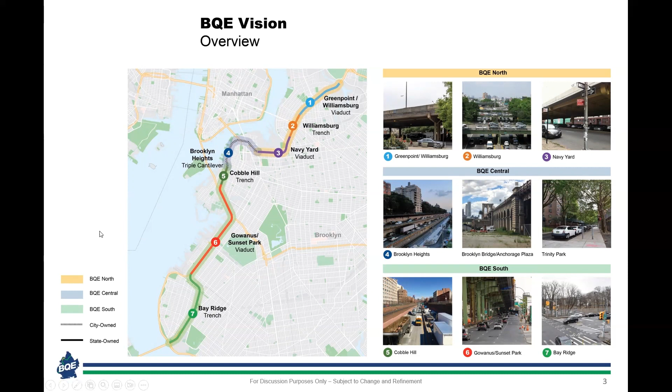We're focusing on the urgency of maintaining a safe city-owned section while reimagining the entire corridor with consideration for sustainable design and centering equity. Moreover, we have a once-in-a-generation opportunity to leverage federal dollars to make these needed repairs and improvements. Our overall timeline is ambitious and is being driven by the anticipated spring 2023 grants that we'd like to apply for, and the overall environmental review and approval timeline.

We don't want to miss this once-in-a-generation opportunity to access transformative federal infrastructure dollars for New Yorkers during the current administration. And most importantly, this project only succeeds through a community-driven process, one that is inclusive, transparent, and consistent.

Here we're showing where we are in our parallel schedule for BQE Central and BQE North and South. Before I walk through BQE Central in detail, I want to note that we are also making progress on the initiatives on the Brooklyn BQE corridor.

For BQE North and South, we completed the first rounds of workshops, mirroring the central process. Currently, our community partners are leading grassroots efforts to gather feedback from their communities, and our next workshop series will take place in late March.

New York City DOT and our sister agencies remain laser focused on delivering safety and public space improvements on city-owned properties along the BQE beginning this year, and will apply for related federal grants in 2023. And on freight diversion, City Hall has kicked off a multi-agency effort to explore viable alternative routes for freight to reduce truck traffic, including on the BQE, such as maritime, last mile, and rail solutions.

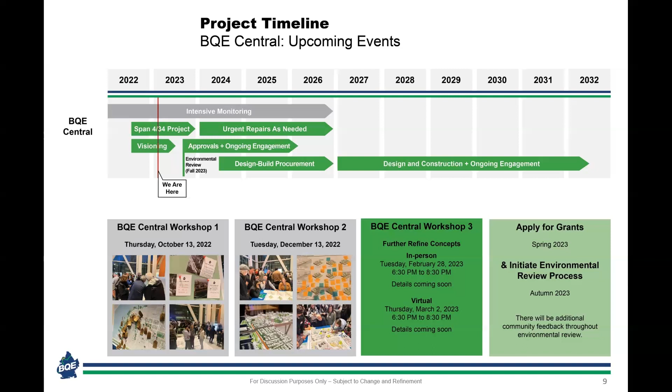This means we are adjusting our schedule by a few months. Instead of beginning environmental review in spring 2023, we anticipate we will begin the process as early as the autumn of 2023, a process through which there will be additional opportunities for community feedback. The schedule has been adjusted accordingly with finalization of design and construction beginning in early 2027. I want to be clear that New York City DOT is prepared to apply for federal infrastructure grants this year for BQE Central, and we'll pursue these funds with a competitive application.

Throughout this process, we've heard a deep desire from our community to better understand the environmental review process, its purpose, and opportunities for public engagement. We've created a brief explainer video to summarize the process, which we're going to play for everyone now.

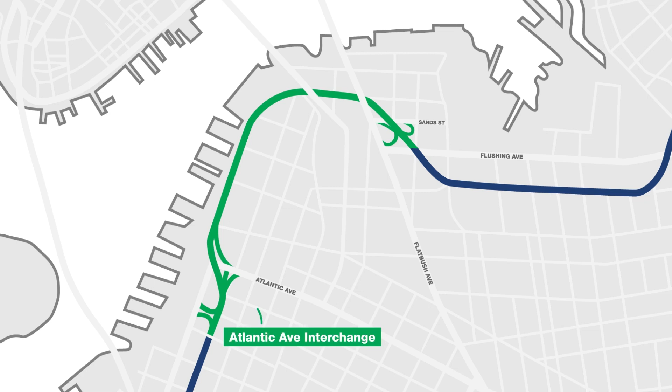The Brooklyn-Queens Expressway Corridor Vision, BQE Central. BQE Central is a 1.5-mile section of the Brooklyn-Queens Expressway from the Atlantic Avenue Interchange to the Sands Street Interchange. It has multiple bridge structures, including the historic triple cantilever, as well as ramps and retaining walls.

The New York City Department of Transportation is leading a comprehensive community engagement process to plan for the safe, modern, and resilient structure we need. Once a community-driven concept is refined, the next step in the project will be an environmental review compliant with the National Environmental Policy Act, or NEPA. That process will last about 2 years and includes several opportunities for community feedback.

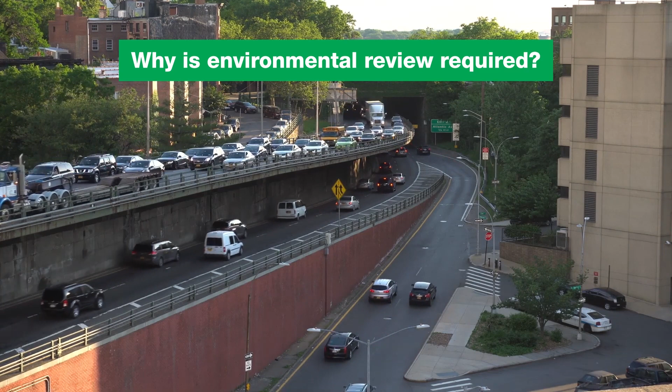NEPA requires federal agencies to examine the potential effects of their policies and programs on the built and natural environment. DOT will seek approval by the Federal Highway Administration for the design and funding of BQE Central, and therefore the project must comply with NEPA and other related federal, state, and local regulations. Consistent with NEPA, a federal agency must clearly identify the purpose, need, and objectives for a proposed action, a reasonable range of alternatives for the action, and the environmental impacts of the action on the built and natural environment.

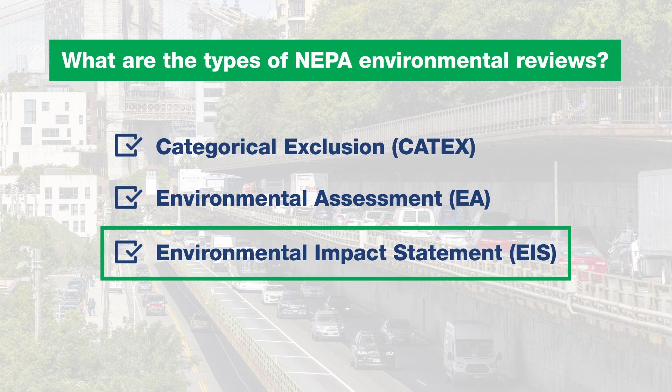The NEPA process can take the form of a categorical exclusion, environmental assessment, or EA, or environmental impact statement, or EIS. Based on the requirements of NEPA, DOT expects to conduct an EIS for BQE Central. An EIS is the most rigorous level of review under NEPA.

NEPA requires that the public have meaningful opportunity to provide input into the scope of the analysis and the environmental impacts and related mitigation measures presented in the environmental document, either a draft EA or EIS.

As part of the NEPA environmental review, DOT will also meet requirements of the New York City Environmental Quality Review, or CEQR process. CEQR requires city agencies to assess, disclose, and mitigate, to the extent practicable, the significant environmental consequences of their decisions in order to meet the description within the CEQR Technical Manual, Chapter 1.

Following the comprehensive community engagement process, DOT will initiate the environmental review in the fall of 2023. We expect the NEPA EIS will take approximately 2 years. Once the environmental review is complete, DOT and our contractors will complete design and begin implementation. DOT will support ongoing monitoring and repairs throughout the process.

To learn about the progress on BQE Central, visit nyc.gov/BQE. New York City Department of Transportation, copyright NYC DOT, 2023.

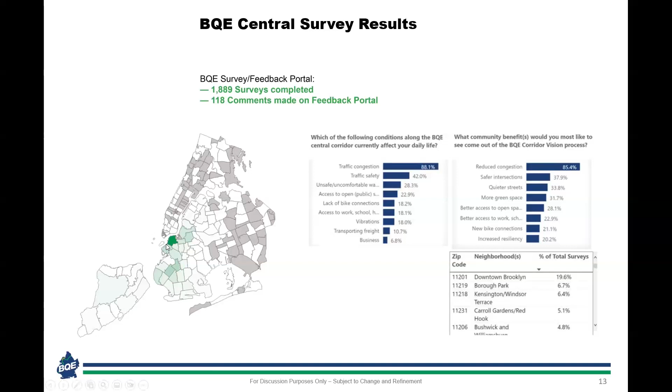As Julie mentioned, we are now in our third round of engagement for BQE Central. Throughout this process, we have received a tremendous amount of feedback in virtual and in-person meetings, the online survey, and small stakeholder meetings. These ranged from concerns around traffic and safety to a desire to explore opportunities for new parks, transit infrastructure, and neighborhood connections.

In December, approximately 500 people participated in an in-person and virtual meeting for round 2 to help us shape the vision and provide feedback on a menu of ideas for BQE Central. We heard a lot of specific feedback about the concepts we presented, as well as a lot of constructive ideas about how to help people evaluate trade-offs, provide more transparent information, and better explain core design and engineering terms.

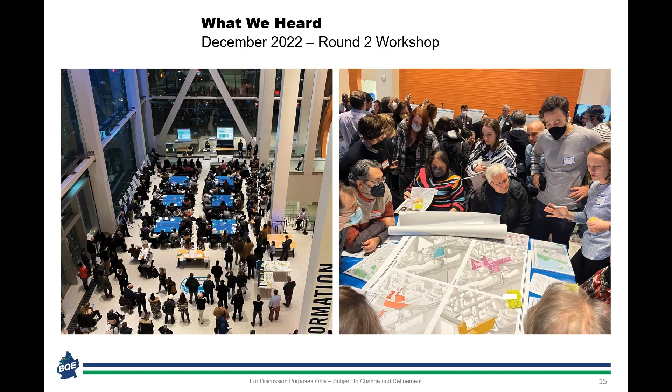Specifically, our team heard a lot of feedback about how BQE Central integrates with other regional initiatives and considerations, including how the city can better organize regional freight movement, including increasing off-hour deliveries and maritime freight, efforts to address vehicle miles traveled with an emphasis on reducing trucks in environmental justice communities, ensuring that construction impacts are well communicated, especially to lessen impacts to small businesses. And finally, ensuring that maintenance planning is central to all investments.

Following our last round of engagement, we wanted to provide a fuller explanation of how the project is addressing several key community focuses, including the overall potential roadway width and the number of lanes possible for BQE Central, how the project affirms and supports the city's climate adaptation strategy, how we as a city and you as stakeholders in this process can support a transparent decision-making process that clearly illustrates trade-offs, and how this project reflects an equitable and balanced approach to planning and investment throughout the Brooklyn corridor and the city more broadly.

In our last round of meetings, our team presented concepts that represented a roadway width of approximately 40 feet and had 2 travel lanes and a shoulder. I should mention that this reflects the roadway width in one direction, Staten Island bound or Queens bound. The specific width of the roadway is something that cannot be predetermined in this part of the process and will require state and federal approval and input in accordance with safety standards.

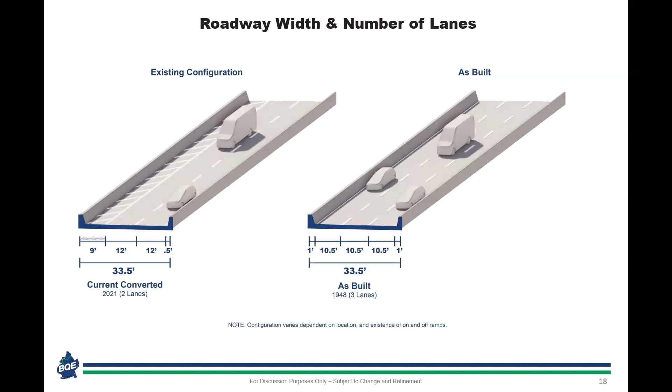For a long-term fix to the cantilever, we are evaluating the potential for either a two-lane roadway built to modern safety standards or a three-lane roadway built to modern safety standards. In the two-lane configuration, in addition to two 12-foot lanes, we would propose shoulders on the inside and outside for safety, resulting in a 38 to 44-foot roadway, along with appropriate provisions for merging for traffic from the ramps.

I quote a range here, 38 to 44 feet, because the two shoulders at federal standard width add up to 20 feet, but the city could pursue deviations from the Federal Highway Administration to allow for narrower shoulders. We understand that there are highways in New York City where people regularly experience more constrained and substandard lane and shoulder widths. However, improving safety is critical, and such exceptions are infrequently granted for new or rehabilitated highways.

As part of our BQE Central studies, we must consider the upstream and downstream impacts of diverted traffic on other communities. In our traffic analysis this spring and summer, we will assess how lane configuration will impact surrounding neighborhoods along the BQE corridor.

In a three-lane configuration, there would be three 12-foot lanes with shoulders on both sides, resulting in a 50 to 56-foot wide roadway, again with maximum 20-foot shoulders total.

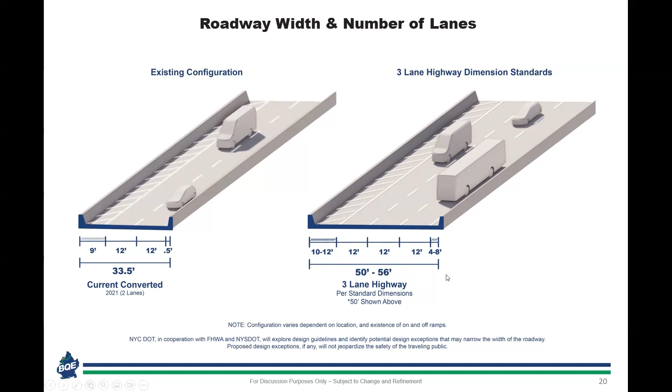We are prioritizing safety within this project, although we must remain flexible in certain constrained locations where there is limited potential to increase the width, such as when the BQE goes under the Brooklyn Bridge.

For comparison, here's what the existing 2-lane configuration looks like as compared to a standardized 2-lane and 3-lane configuration.

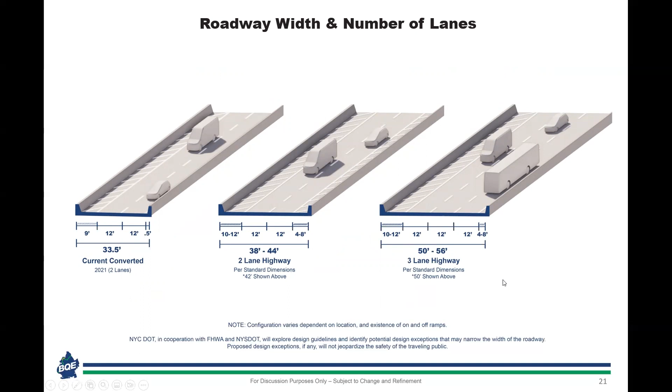To recap, DOT is committed to studying both 2- and 3-lane roadway configurations. We are required to study current traffic demand and potential demand in the future. We will incorporate known plans into our analysis, such as congestion pricing, to assess how a 2-lane or 3-lane capacity meets the needed demand through the project limits.

This will also help us to understand the potential resulting effects now and in the future across the entire BQE corridor in Brooklyn. In coordination with the New York State Department of Transportation and Federal Highway Administration, the New York City Department of Transportation is developing the study requirements, and the final decision about this section of interstate will be made with our federal and state partners through the environmental review process.

The study will start in the coming months while other documentation is also completed, after which we will update the public of the results. Environmental review is anticipated to begin as early as fall 2023 in coordination with our state and federal partners.

Following our previous presentation, many people asked for further explanation of the partial versus full replacement options.

A partial replacement approach would maintain the existing retaining walls of the triple cantilever, but create a new frame structure in conjunction with repairs to the retaining walls to increase the lifespan of the structure. This means construction would have lesser implications for adjacent properties, but also do less to mitigate the vibrations they currently experience. This approach also reduces the flexibility in how the framed structure is configured.

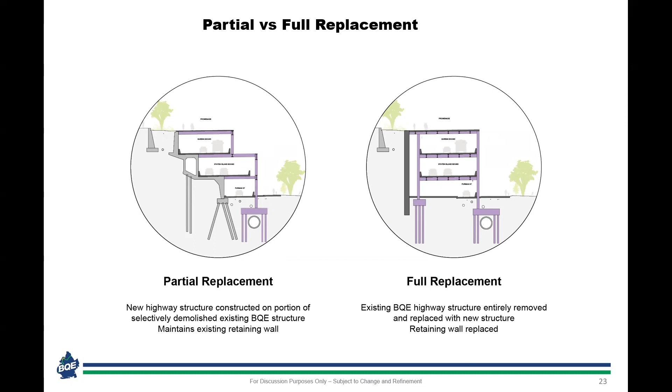A full replacement approach would replace the existing retaining wall, resulting in a completely separated roadway structure from the wall supporting the bluff, likely doing more to mitigate vibrations in surrounding communities. This also allows for greater flexibility for any new structure.

We promised to come back to you today to speak about the construction process. While we can't describe an approach in detail before a design is further developed, we want to share at a high level what would be under consideration. There are two possible approaches to a construction project like this: temporary bypass or traffic diversion.

A temporary bypass requires building a temporary structure or structures that reroute traffic off of BQE Central to allow the BQE to be under construction. Depending on the length of the bypass, it could take around 1 year to build and be in service for 2 to 3 years, with less time for shorter segments.

This means a bypass would shorten the length of construction, but would create larger temporary structures adjacent to Brooklyn Bridge Park and adjacent buildings. As we've said from day one, DOT will not build a temporary bypass at grade with the promenade or with Brooklyn Bridge Park.

On the other hand, traffic diversion requires ongoing overnight closures for nighttime construction and several weekend shutdowns. Our modeling shows that such diversion would increase local traffic significantly and require truck detours via local streets that are not truck routes. This approach would also result in longer construction durations and potentially limit the flexibility of concepts in certain areas.

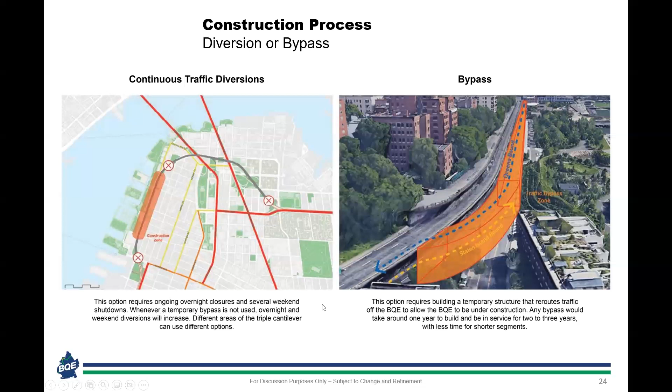During our outreach, many people wanted to see climate action reflected more prominently across all our proposals. DOT is investigating opportunities to integrate approaches that promote environmental sustainability, encourage mode shift and greenhouse gas emissions reductions, and explore opportunities for sustainable freight and goods movement.

DOT is already working with agency partners to encourage truck electrification, cargo bikes, and maritime freight, while advocating for necessary state legislative changes and pursuing federal grants for additional support.

The city is also keenly aware of the potential impact that congestion pricing may have on BQE drivers, though its impact is unlikely to result in traffic evaporation without more aggressive approaches to reduce demand.

Many of these big ideas need to be explored in the context of the city's larger climate strategy, and we look forward to sharing these solutions with you as the design process progresses.

Lastly, participants have expressed a shared interest in better understanding the trade-offs that will be considered in this decision-making process, from both the city's perspective and the community's. We understand that not everyone goes into a process with the same priorities, and that each individual evaluates a project based on a different set of inputs and ideals.

A handout is available with a list of these considerations and some related questions we are considering for you to keep in mind as you view and discuss concepts today.

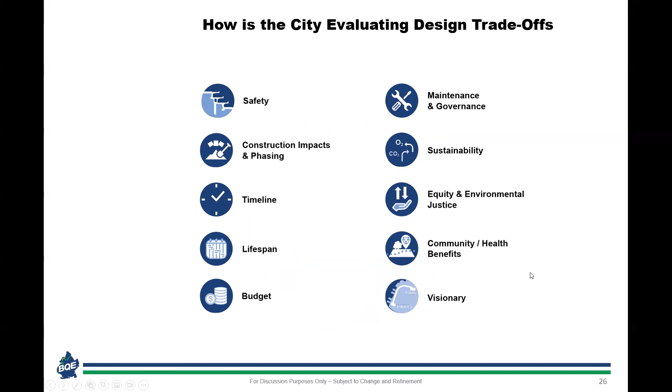Thank you, Bahish. Based on the comprehensive feedback that we received during the last round of workshops, the design team has been working over the past couple of months to advance a refined set of concepts for community review and discussion.

As we go through each concept, we will provide an overview of what was shown previously, a summary of what you liked and didn't like. Then we will illustrate a refined concept with an emphasis on showing eye-level perspectives to help you understand how these spaces might feel at a pedestrian scale.

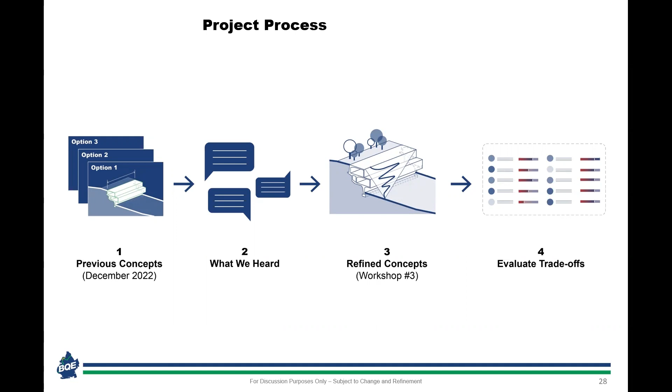And as we move beyond this phase, we'll present some of the trade-offs of each concept. Before we do, it's worth restating that one of the core goals in the BQE Central project is to balance the regional need for transportation infrastructure within the reality of a dense urban neighborhood.

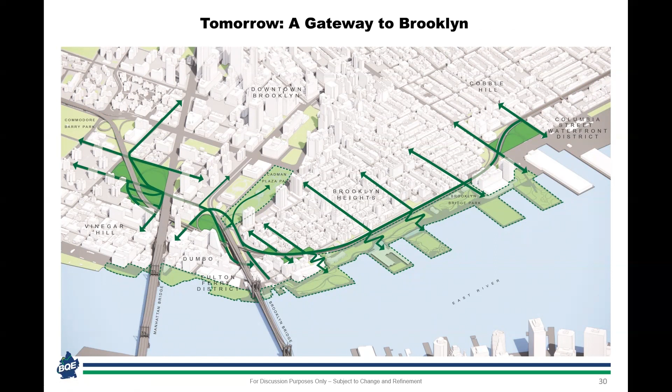We want to work with you to explore strategies that overcome the highway as a physical barrier between downtown Brooklyn, Brooklyn Heights, DUMBO, and the waterfront, and highlight ways of transforming it into an inviting gateway to Brooklyn's downtown, waterfront, and historic neighborhoods.

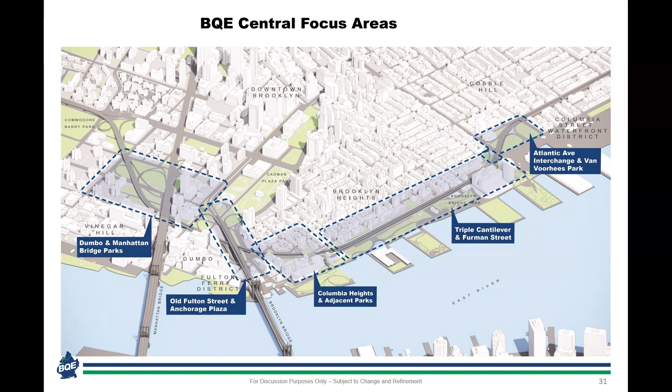For each design concept, we will zoom into one of 5 focus areas, moving from the triple cantilever to the remaining sections. I'll now invite Jeremy Siegel from Bjarke Ingels Group to walk everyone through our latest design concepts for the triple cantilever.

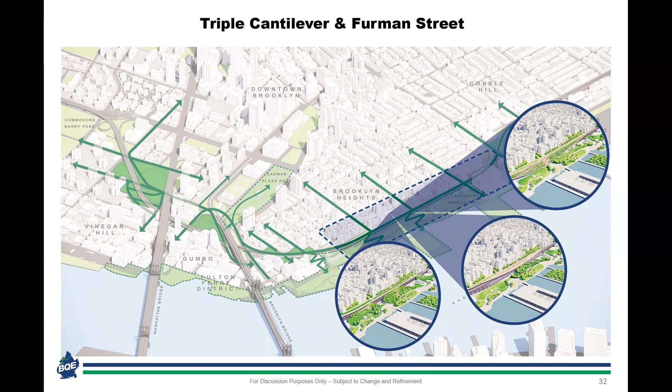Thank you, David. So during our last workshop in December, we presented 3 different approaches to the triple cantilever section of the BQE: the terraces, the lookout, and the stoop. In going through these concepts, we heard a lot of constructive feedback and some very specific questions related to the engineering, impacts, and trade-offs of each of these concepts.

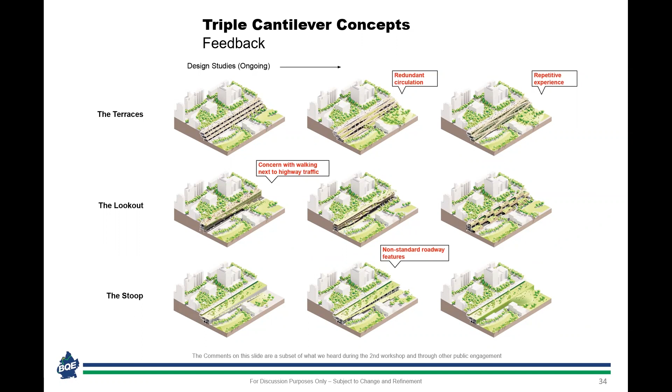We also heard an appetite to better understand these concepts at a more experiential level, with a focus on how each works at specific pinch points and existing views. After presenting a menu of design studies, many people expressed feedback and concerns about designs that would place pedestrians in close contact with traffic, have repetitive circulation and experience, and produce non-standard roadway features. We digested that feedback and have used the past several months to refine our design approach and clarify some of these questions.

Today, we will present updates on the 3 concepts from the last workshop. We will begin with terraces, then discuss the lookout, and finally provide an updated design concept for the stoop. Of these 3 concepts, the open space approach for the terraces and the lookout can work in both a partial and a full replacement. The last option, the stoop, can only work as a full replacement. In the graphics shown tonight, the terraces have been illustrated with a partial replacement of structure, while the stoop and the lookout are both shown as complete replacements of the structure.

Today, we want to hear from you what you like about each of these open space strategies, since elements of all of these concepts can be adopted in a further refined design.

As we shared at our last meeting, during our first round of outreach, many people expressed they wanted to see a design that would achieve something similar to what was illustrated in the BQ Park concept, which was depicted as a fully covered roadway running through Brooklyn Bridge Park along Furman Street, with an open space covering the entire length of the corridor. Through in-depth review of the BQ Park proposal, several challenges were identified for both 2-lane and 3-lane configurations, including roadway geometry limitations, physical infrastructure conflicts with private property, building foundations, MTA infrastructure, and utilities.

To capture the spirit of the BQ Park proposal, the team has been exploring concepts with partial tunnels and decking, including the stoop, which has similar benefits, including additional open space, less visible roadway structure, while meeting geometry standards. This and other concepts have been presented publicly and continue to be refined.

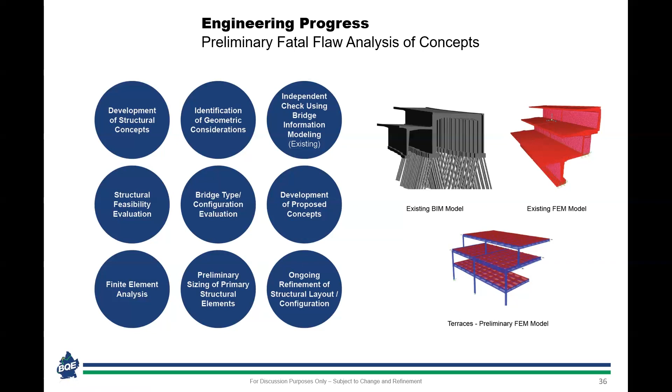It is important to note that the final configurations of open space may have design impacts and will continue to be carefully considered. We will continue our design development as we refine the concepts to ensure that traffic and safety are appropriately addressed. During our last workshop, we presented the terraces in combination with a partial replacement of the structure.

We noted that the terraces, as a partial replacement that reuses the existing retaining walls of the structure, could have an open space approach that follows the stepped profile of the new roadway. Many people expressed concerns about the proximity of these open spaces to traffic and were unclear how these potential open spaces could connect to existing pedestrian corridors, which we aim to address in this refined concept.

Throughout our outreach, we consistently heard how important it is for us to better connect people to the major pedestrian routes and transit nodes in Brooklyn Heights, especially Cranberry Street with access to the A and C trains, Clark Street with access to the 2 and 3 trains, and Montague Street, which connects to the R, 4, and 5 trains.

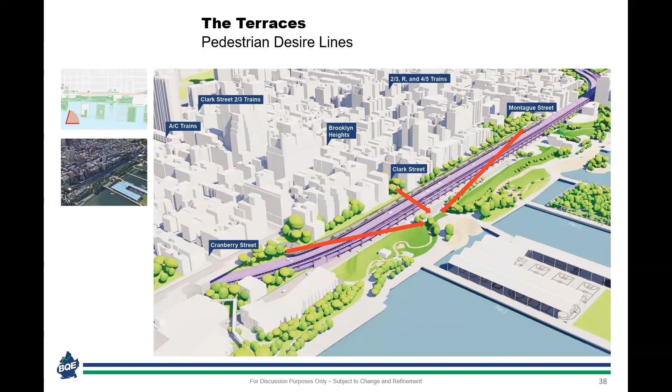These pedestrian desire lines inspired our refined approach. Using these key pedestrian routes as a starting point and ramping downward, the team adopted a design that brings 2 standard accessible ramps together from the promenade all the way to Furman Street, where the berms of Brooklyn Bridge Park have an arrival plaza at Clark Street.

At Clark Street in Brooklyn Heights, a series of steps cascades directly down into the park, emphasizing one of the most important access points between Brooklyn Heights, downtown Brooklyn, and Brooklyn Bridge Park. This approach worked to limit any impacts to the existing berms of Brooklyn Bridge Park while lessening the visual presence of the highway as seen from both the promenade and the park.

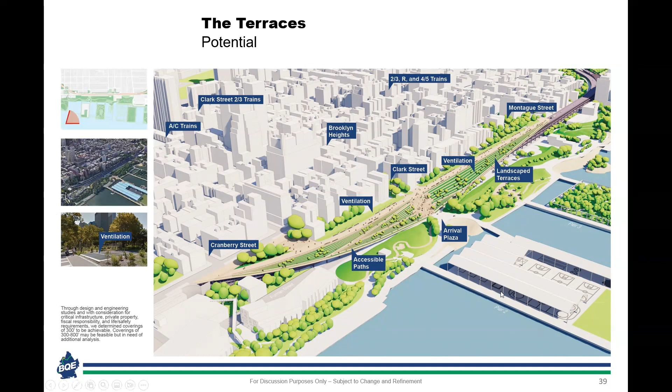To make this approach work, further study of ventilation, life safety requirements for the structure would be required during the design process. While we believe that this design approach could work, we want to acknowledge that provisions for natural ventilation spaced at intervals will be required in any partial tunnel greater than 300 feet in length.

In this design approach, the terraces could form a stepped landscape that parallels the contours of the roadway, minimizing the impact to the existing berms while maximizing access from the promenade to the park. The terraces themselves could have a generous planting that winds down the steep slope, similar to a new park space designed for the Brooklyn Botanic Garden, which has similarly steep slopes, but offers an intimate landscape experience for pedestrians along its winding paths.

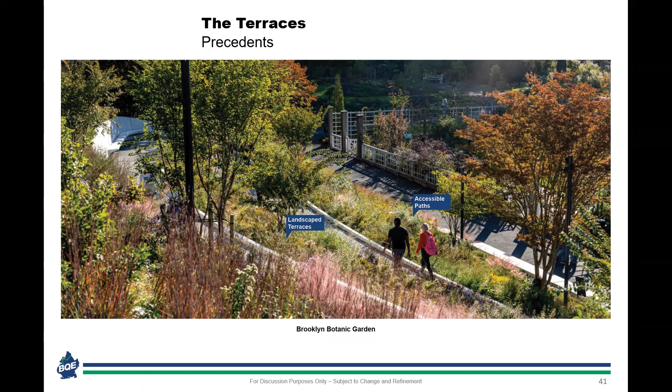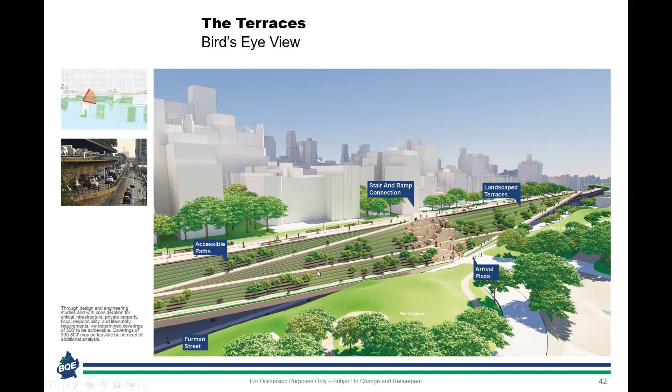Looking towards Brooklyn Heights at Clark Street, these terraces limit the visual impact of the structure between the berms, while fostering a unique approach that integrates landscape and transportation infrastructure, while also allowing air to pass through the structure at the sides.

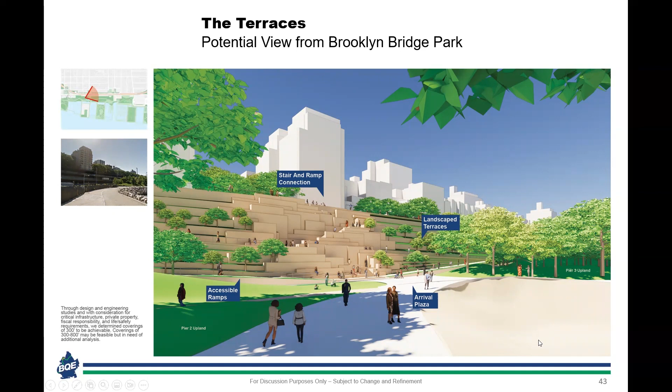From within Brooklyn Bridge Park, pedestrians would look towards a new access route to the promenade at Clark Street, offering a more direct connection from the park to the neighborhood and the subway. On the terraces themselves, the design might feel like a stepped amphitheater oriented out towards the East River over Furman Street, serving as a multifunctional space for sitting, lounging, exercise, and travel.

At the promenade level, the view across the river to Lower Manhattan would be preserved and could maintain an additional buffer for planting and seating, while preserving the elements of the promenade design that people know today. The terraces themselves would mitigate sound from below the promenade, likely with ventilation at regular intervals based on further engineering analysis and design.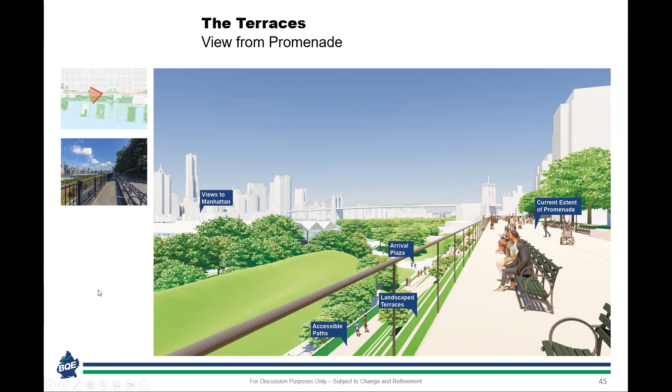Please note that more extensive street-level views of Furman Street, including at Joralemon Street, have been made available as part of breakout table materials.

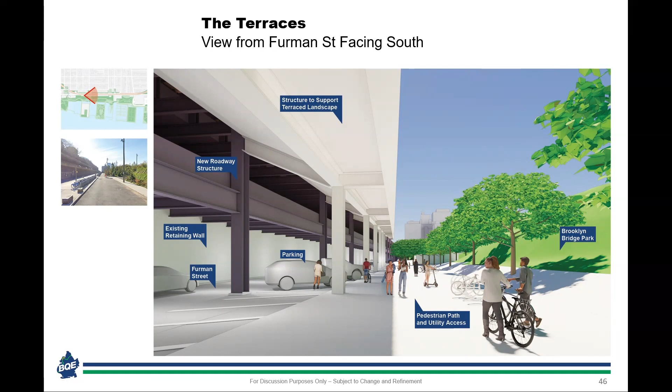During Workshop 2, the lookout concept was presented in combination with the full replacement of the structure. Similar to the terraces, the design team wanted to explore ways of establishing a stronger connection from the park to the promenade at each of the key routes for pedestrians at Cranberry Street, Clark Street, and Montague Street.

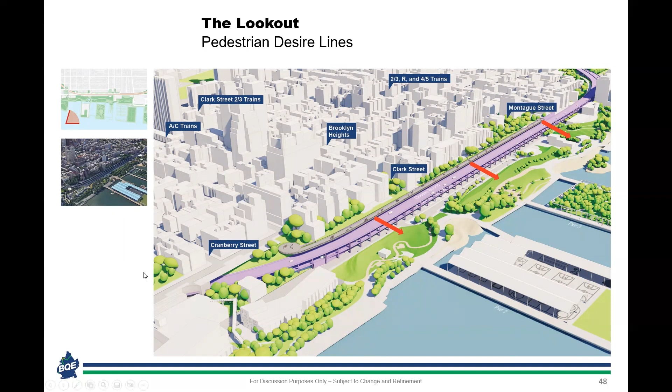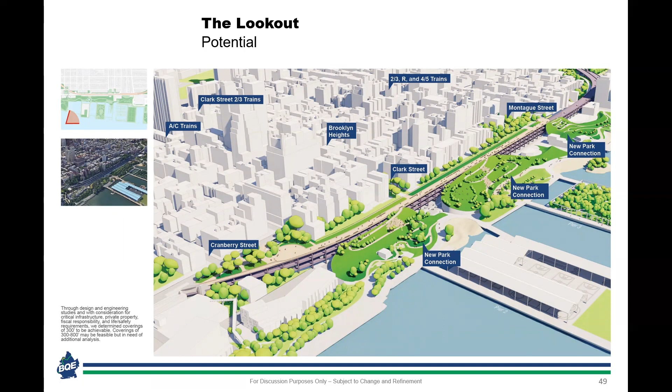Whereas in the terraces concept, the design idea focused on bringing the promenade down into the park via converging ramps, in the lookout, the design focuses on bringing Brooklyn Bridge Park up to the promenade. This approach would modify or replace components of the existing Brooklyn Bridge Park berms, creating a direct landscape connection up to the promenade at 3 major access points.

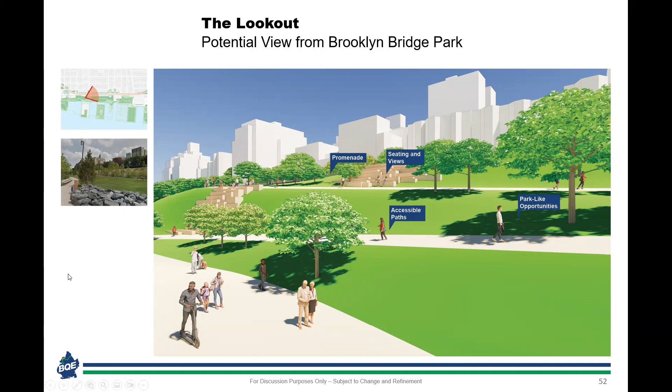This connection would need to account for access to the existing utilities and weight load constraints on the utilities themselves running along Furman Street. The concept would build on the existing berms that are currently in Brooklyn Bridge Park and transform them into multifunctional planted and foreground landscapes that translate the best aspects of Brooklyn Bridge Park to the level of the promenade.

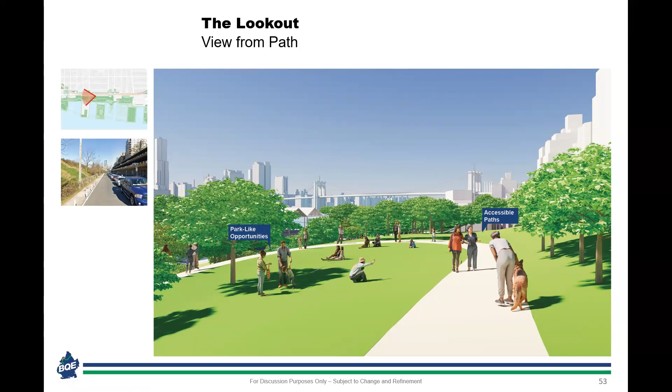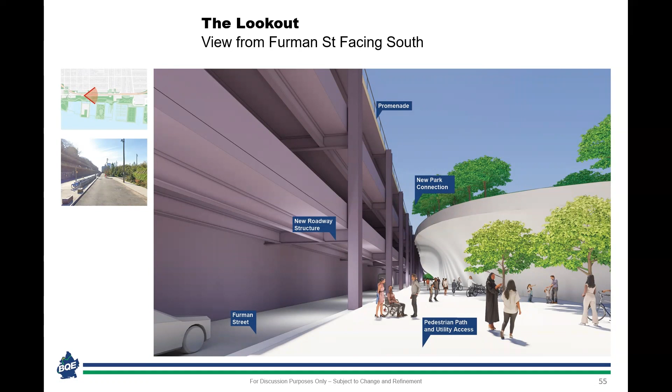This landscape would build on the elements of the park landscape present today, but expand their functionality and use them as a strategy to limit the visual impact of the highway. At the promenade level, the existing pedestrian pathway could be widened strategically while preserving the experience offered by the promenade today. Viewed along Furman Street, the underside of the berms would meet the replacement structure with the new retaining wall, preserving access into the park at key points and access to utilities along the street, such as the DEP interceptor.

During the last workshop, the design team presented the stoop as an option that could bring the roadways down to a single level, allowing for a wider open space on top in a limited area of 150 feet.

This concept was carefully considered as a way of translating some of the design elements of BQE Park, but adapted to the existing constraints of the corridor and the need to have the structure in a stacked configuration at Furman Street. Where the roadway comes down to one level, the promenade could extend and slope down into a broad stoop overlooking the skyline and Brooklyn Bridge Park.

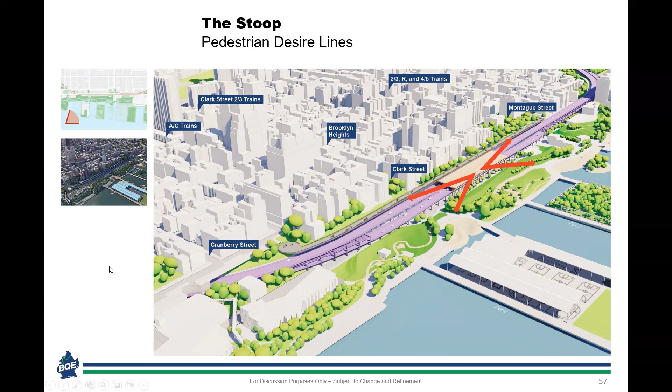Similar to the other concepts, pedestrian access would connect to the major pedestrian routes in Brooklyn Heights, guiding people towards the center of the promenade and the central berm of Brooklyn Bridge Park. This would create a design concept in which the promenade and the park meet near the flattest, lowest point in the middle of the roadway structure.

While this design approach would expose more of the highway structure itself due to the braiding and unbraiding of the roadways, the stoop could reimagine the experience of the promenade as an expansive step plaza looking out on the East River, linked to a sloping hill that seamlessly blends into Brooklyn Bridge Park at its midpoint.

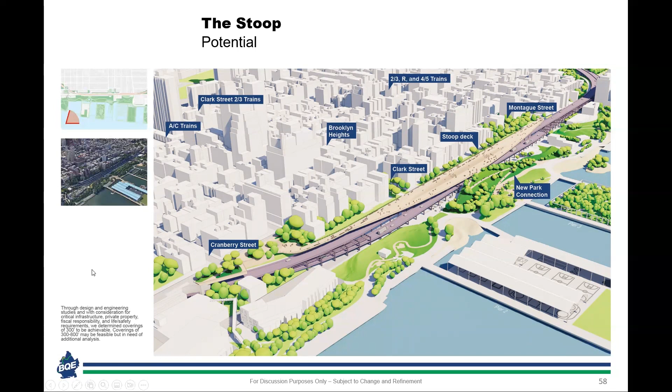This approach would enable a more gradual transition into the park at a limited section where the roadways run parallel. Similar to the lookout, the stoop could rebuild or structurally modify Brooklyn Bridge Park's existing berms. This design approach would combine an urban amphitheater with broad sloping hills and landscapes that blend into the park below.

Because the stoop merges down to a single level, it could potentially have a greater direct impact on the park and have more exposed structure, elements that could be mitigated through the design process.

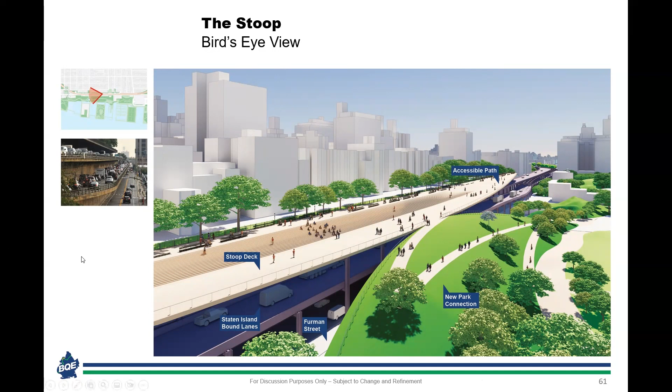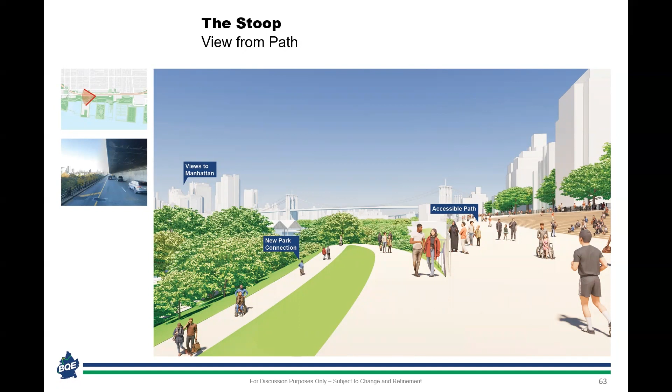From the park, the effect would be much the same as the lookout, with an enlarged central berm that connects up to the promenade. Because this option would be less steep, the experience above the single-level roadway could feel more expansive and less confined to ramps, as shown in the previous options.

That more gentle transition would be clearly felt at the level of the promenade. At Furman Street, the overall structure would have a larger footprint in the park where the roadway runs parallel, but could be further mitigated through the design process.

So as a team, we're confident that the terraces, the lookout, and the stoop can all deliver a combination of safety improvements, a longer structural lifespan, and unique approaches to enhancing open spaces and connectivity. While these three approaches are all technically feasible, it's worth emphasizing that there are distinct differences in approach that will need to be refined as we move forward.

In summary, the terraces would form a stepped landscape with long converging ramps down to Brooklyn Bridge Park, minimizing the impact to the existing park and berms, while maximizing access from the promenade down to the park.

The lookout, by contrast, looks at bringing Brooklyn Bridge Park up to the promenade by creating a direct landscape connection to the promenade at three major access points, while preserving the linear experience offered by the promenade today.

And the stoop aims to bring the roadway to a single level, creating a significant wide open space on a limited stretch of covered roadway. This would allow the promenade to extend and slope down into Brooklyn Bridge Park.

While the terraces and the lookout open space concepts work as a partial or full replacement, the stoop only works as a full replacement. That said, if specific open space ideas in the stoop are appealing, there may be ways of achieving them in the other two concepts.

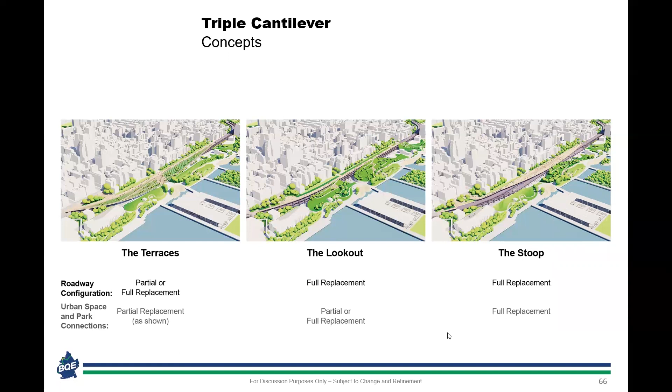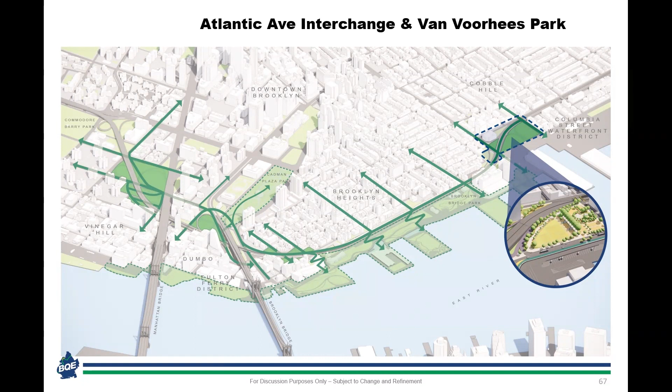Thank you, Jeremy. Before we move on to discussing the other potential concepts north of the Triple Cantilever, I want to note that tonight's meeting will not focus on Atlantic Avenue.

During our last meeting, we shared three high-level concepts for Atlantic Avenue that focused on reconnecting Van Voorhees Park by standardizing the on and off ramps of the BQE at this location. These ideas focused on one potential approach to standardization of the existing highway on and off ramps.

As illustrated, this version did not fully address the competing traffic needs of the interchange, along with the bike and pedestrian safety and access challenges that exist today. Since the workshop, DOT has also met with local stakeholders who voiced concerns about safety, congestion, and impacts to local businesses, and shared new interesting ideas to address competing priorities.

We want to deliver on the best possible solutions for this complicated interchange, and we need more time to get it right. We are continuing to develop concepts for the entire Atlantic Avenue interchange, and our team is currently working through several potential approaches that we hope to show in a separate public meeting this spring.

These options would all consider improvements for pedestrians, cyclists, and drivers along Atlantic itself, improvements to the entrance to Brooklyn Bridge Park, standardized and reconfigured on-off ramps, and potential enhancements to Van Voorhees Park. We will be announcing the timing of the meeting soon, and we'll share more information in the weeks ahead.

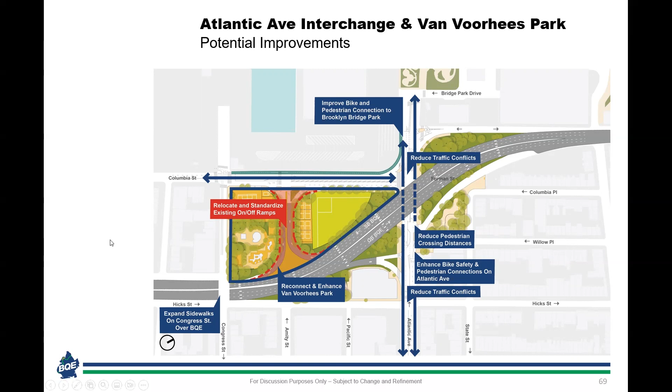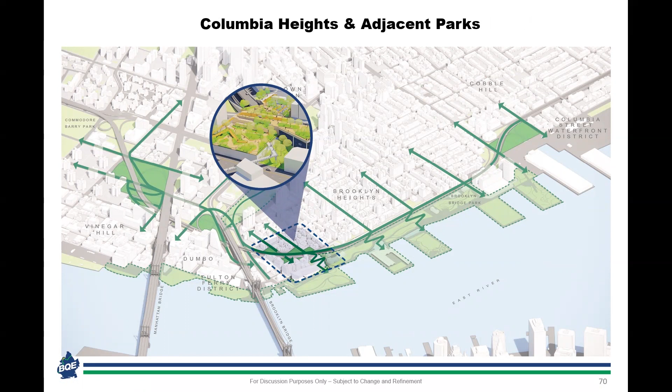While the Triple Cantilever is one of the most challenging aspects of the project from an engineering perspective, many of the most significant opportunities for enhancing the gateway to Brooklyn lie north of the Triple Cantilever structure.

During round 2, we showed 3 different ideas for how the area around Columbia Heights and Squibb Park could be reimagined as a community-focused node with improvements to the surrounding streetscape, parks, and more direct links to the promenade. These ideas were well received, and we received a range of suggestions related to balancing community needs with public access, questions about the extent of the structure over the BQE, and opportunities for accessibility improvements.

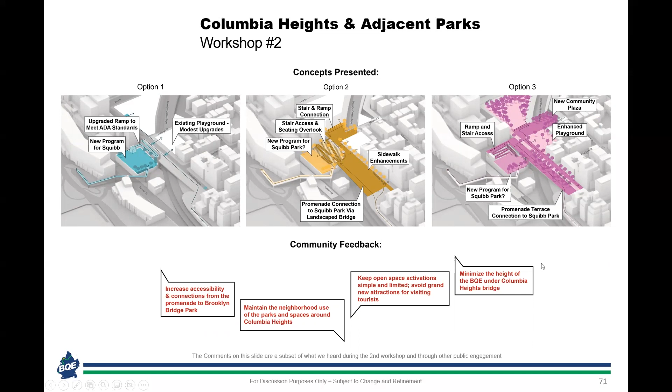Today, the area around Columbia Heights represents an important cluster of community amenities and is the most direct link between Brooklyn Bridge Park and Brooklyn Heights via the Squibb Park Bridge.

In looking at opportunities at this intersection, we saw a clear chance to connect this cluster of community parks while creating a stronger connection to Brooklyn Bridge Park and creating a more seamless link to the promenade.

To enhance access, the connection into Squibb Park could be reconfigured as an accessible pedestrian path and linked to Harry Chapin Playground and Hillside Dog Run via a raised crosswalk. Additional seating and planting could ensure that these areas complement existing and surrounding vegetation.

As part of this, the design could extend the area over the BQE as a lookout with a more direct connection to the promenade and the Fruit Street sitting area.

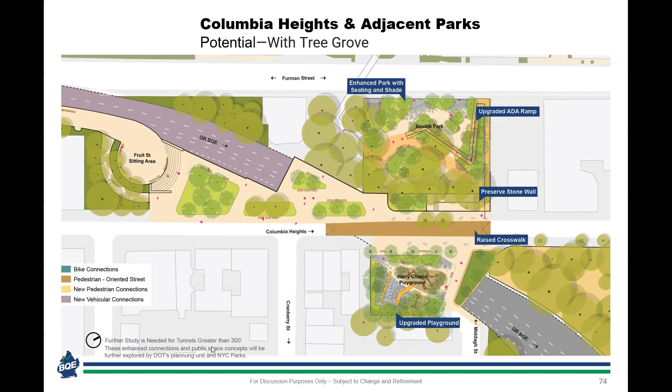A second concept might explore leaving room for a potential community amenity at Squibb Park.

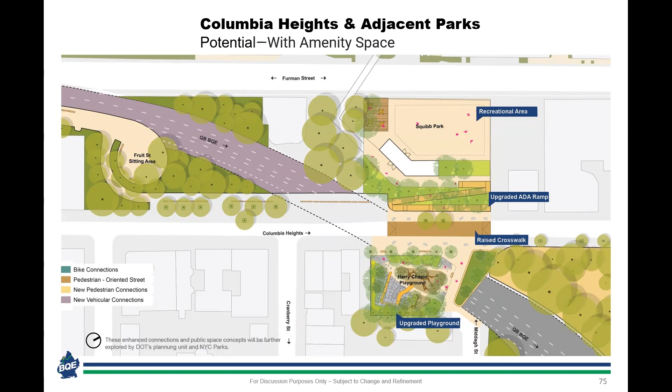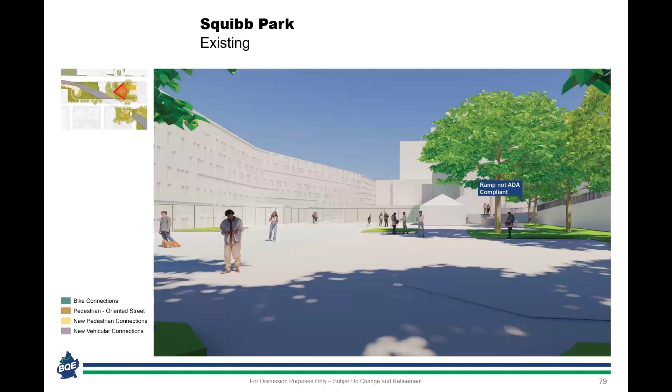Here is an existing view of Squibb Park looking north. The park could be more heavily planted with seating, amenities, and more robust programming, as well as other elements that could make the space more inviting.

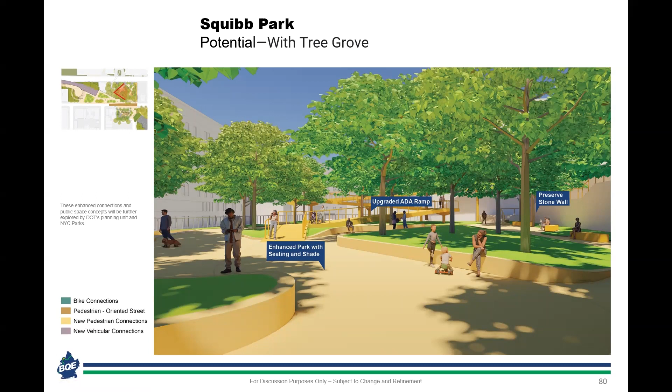A new fully ADA accessible serpentine bridge would bring people down through the park into a wooded grove, and this could be a bridge or integrated into the landscape itself. Please note that any enhancements to parkland shown this evening would be developed by New York City Parks.

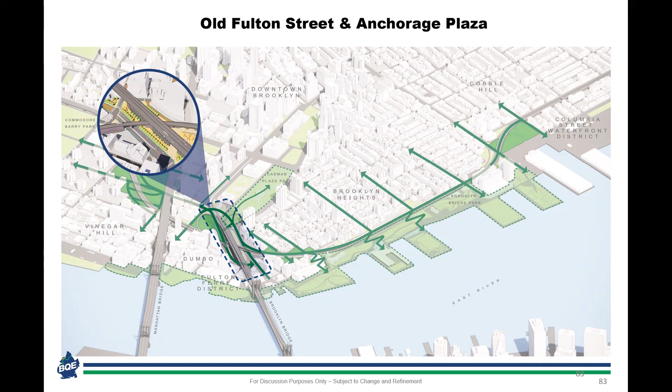We'll now move north to look at the potential transformations of the area around Old Fulton Street and Anchorage Plaza. During our last round of workshops, we heard a lot of positive feedback about ideas for Old Fulton Street and Anchorage Plaza. Participants appreciated focused improvements to pedestrian safety and were encouraged by the potential ramp closure being explored at York Street and the enhanced public access and connections under the BQE.

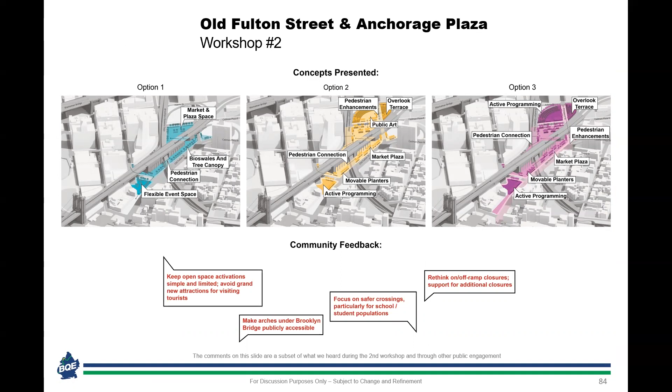Today, the areas around Anchorage Plaza, Old Fulton Street, and the BQE feel distinctly like a series of vehicle on-off ramps, creating significant conflicts between tourists, residents, cars, and bikes. Parks in these areas are generally underutilized, and the BQE acts as a barrier between the Fulton Ferry District, Brooklyn Heights, downtown Brooklyn, and DUMBO.

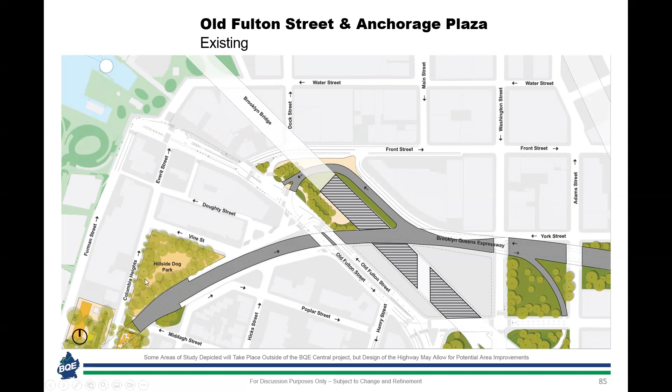The potential design could reimagine Anchorage Plaza as a gateway to Brooklyn, eliminating complex islands, potentially closing the York Street off-ramp, and reclaiming it as a public space, opening Ash Alley as a direct pedestrian crossing under the bridge, creating a new direct connection under the BQE from Anchorage Plaza to York Street, and enhancing Washington Street and the surrounding parks as pedestrian-oriented streets with direct connections to DUMBO.

The reconfiguration of the BQE opens up new opportunities to re-envision the streetscape surrounding the Brooklyn Bridge. In the potential configuration illustrated here, DOT could replace complex traffic islands with a sequence of pedestrian plazas that create a more contiguous experience for residents and visitors while enhancing safety and connectivity in and around the bridge.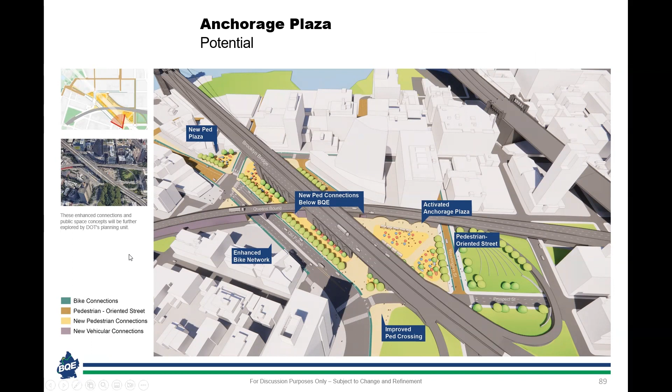Today, Ash Alley and Anchorage Plaza are inaccessible to the public. This pedestrian view shows how Ash Alley could potentially be reopened and how Anchorage Plaza could be reimagined as a major pedestrian route with pop-up programs, markets, planting, and seating.

On the north side of Anchorage Plaza today, there is an inaccessible staging and construction zone. We have an opportunity to reimagine that area as a public plaza while maintaining space for maintenance and repairs to the Brooklyn Bridge that will be needed over time.

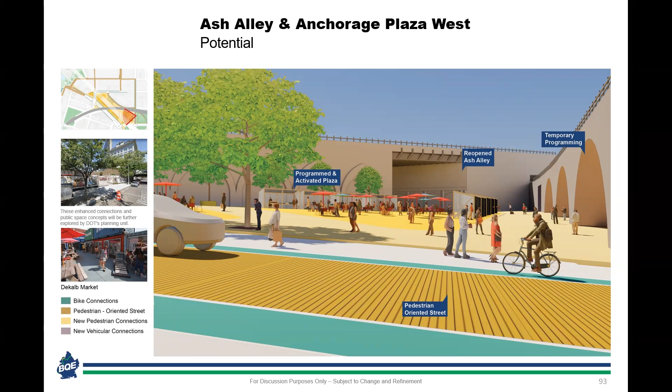Along the BQE itself, we could explore a new connection underneath the structure to York Street while looking at opportunities for pop-up activities and events similar to those that occur under the Manhattan Bridge today.

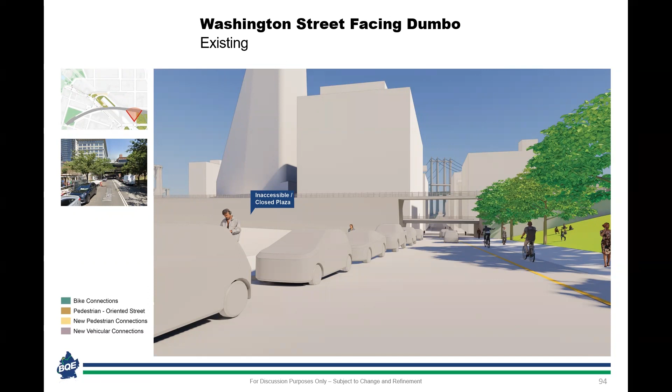Today, Washington Street is an important link to DUMBO, but has few pedestrian amenities. Washington Street could be reimagined as a welcoming gateway to DUMBO with pedestrian-oriented streetscape elements that guide people to the waterfront.

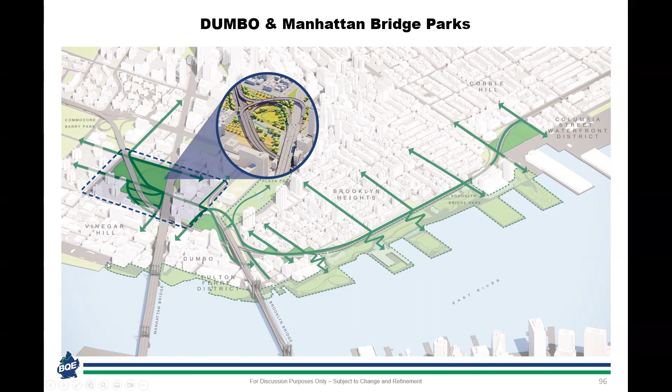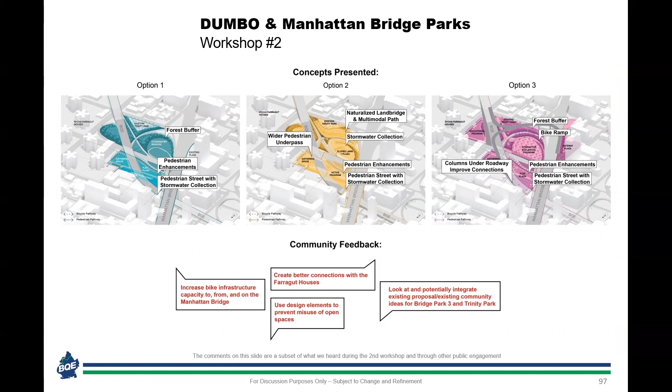Similar to Old Fulton Street and Anchorage Plaza, the area in and around the Manhattan Bridge, Trinity Park, and Farragut houses today feels disconnected and unwelcoming and can be challenging to navigate. We presented a variety of ideas for how to improve those conditions at our last meeting and heard excitement about new pedestrian and bike connections, as well as support for direct vehicle connection from the Manhattan Bridge to the BQE, which would relieve local streets of truck traffic.

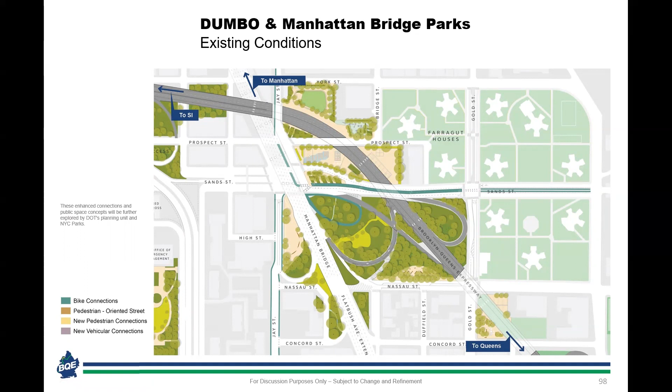Today, this area suffers from a lack of connectivity, underutilized open spaces, and frequent double parking. A potential new vehicular connection could significantly improve how vehicles get on and off the BQE while relieving local streets of truck traffic and congestion.

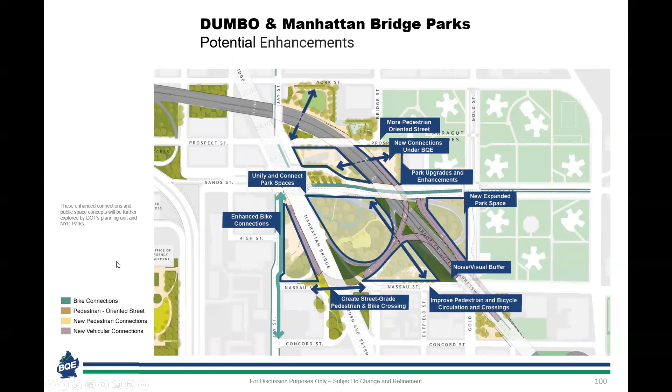A potential plan for this area could be coordinated with a series of improvements to the surrounding park spaces, including pedestrian and bike access routes, newly programmed park spaces, and a potential street grade crossing at Nassau Street.

In combination with these open space improvements and a direct link to the BQE, a potential direct connection across Nassau Street could be possible, reconnecting the grid at a critical juncture.

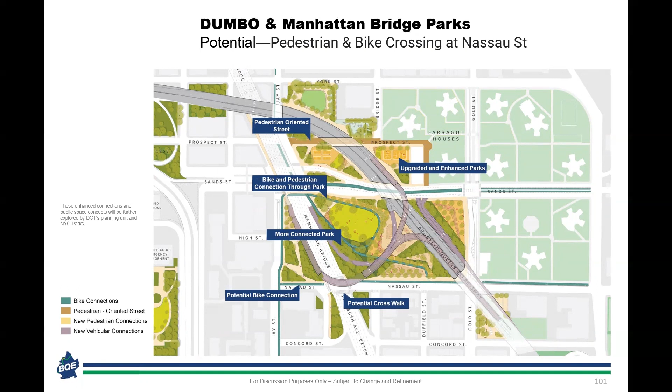Here's an aerial view of this area facing downtown Brooklyn. Potential improvements would strive to resolve the challenges that trucks and traffic face in the area, while also reimagining these spaces as a community node that connects the Farragut houses to DUMBO and the waterfront.

Facing the parks, currently the parks in this area have a significant number of cars that park along the street and feel unsafe and unwelcoming. Logical connections between streets are difficult to discern if they exist at all.

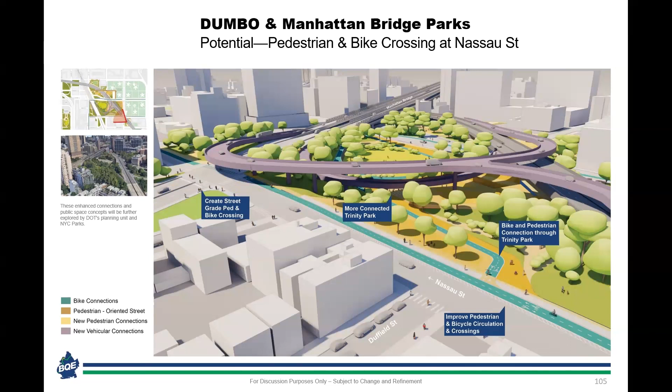The potential condition would emphasize connectivity under the highway and over Flatbush, making this entire area into connective tissue between neighborhoods while also limiting truck traffic on local streets.

With the addition of a new on-ramp, the design would need to reimagine the view down Flatbush and ensure the bridge design preserves as much of the view of the Manhattan Bridge as possible, while enhancing this as a gateway as part of the design for new ramps and bridges.

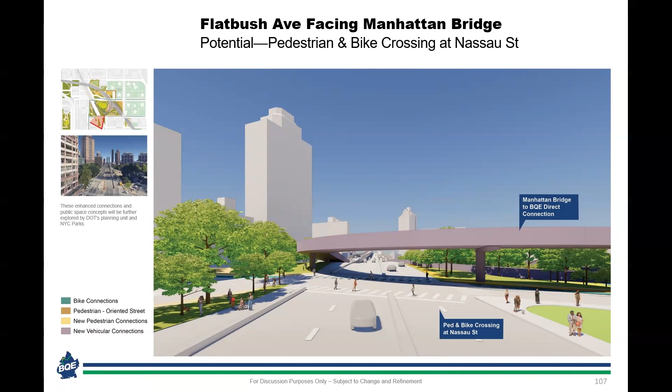A direct pedestrian connection at Nassau Street would help balance the needs of local pedestrians with those of regional traffic. At Prospect Street and Trinity Park, the streetscape could be enhanced with pedestrian amenities that link park spaces and ensure a safe, inviting connection through the neighborhood from DUMBO and Brooklyn Heights all the way to the Farragut houses and the Brooklyn Navy Yard.

In total, these collective improvements have the potential to restore many of the connections that were lost when the BQE was originally built, while creating new benefits for regional traffic and crafting a necklace of inviting community spaces that can link all the way from the Farragut houses in Vinegar Hill to DUMBO and Fulton Ferry District to Brooklyn Heights and Cobble Hill.

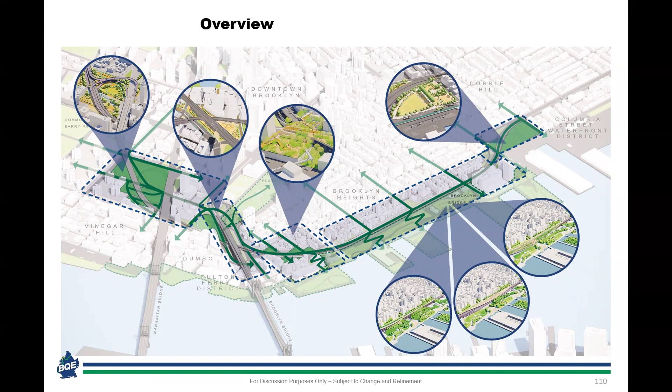Once completed, these investments in BQE Central could add significant new connections over and under the BQE, a wide swath of enhanced streets, parks, and public spaces, and a range of critical highway safety and pedestrian improvements.

We are committed to working with you to ensure that these strategies and benefits are distributed throughout the entire corridor in a balanced way and implemented holistically to improve access, safety, and connectivity across one of Brooklyn's most significant gateways.